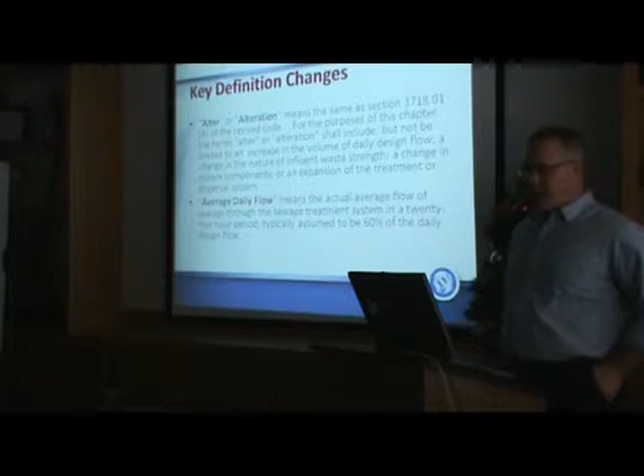A few key definition changes from the first one. Alter and alteration has been spelled out, so it's been expanded. So that would also include any time a person is expanding the size of their house, so that we can look at altering the system to accommodate that additional flow.

Average daily flow was added. All these years we've always looked at peak daily flow, and you all know that is 120 gallons per day per bedroom when we design a system. So 360 gallons per day for a 3-bedroom house. Well, probably just to be more clear about that, that system is really only designed to accommodate an average daily flow, not a peak daily flow every day.

So the average daily flow is now defined as 60% of the design flow. 60% of that 360, which I think is about 210, somewhere in there. The sanitary sewer people use that same figure when they're designing sewers.

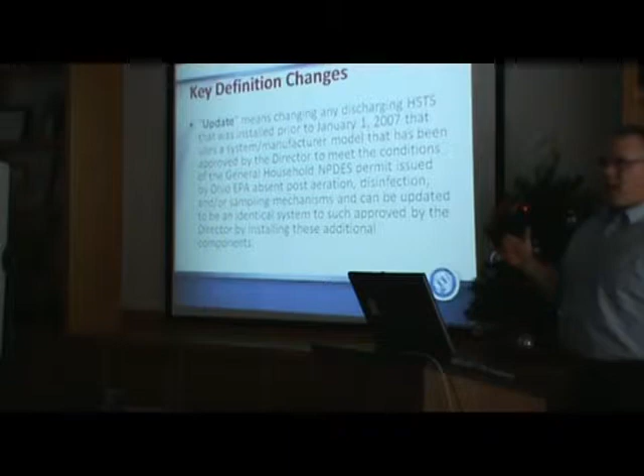Update. Well, they added a definition for update, and what that does is if you have an old aerobic treatment system, not terribly old, not 1977 old, but if we're talking something maybe that was installed in the 90s, early 2000s, it needs to be upgraded for some reason. Let's say something happened to the system and it needs an upgrade.

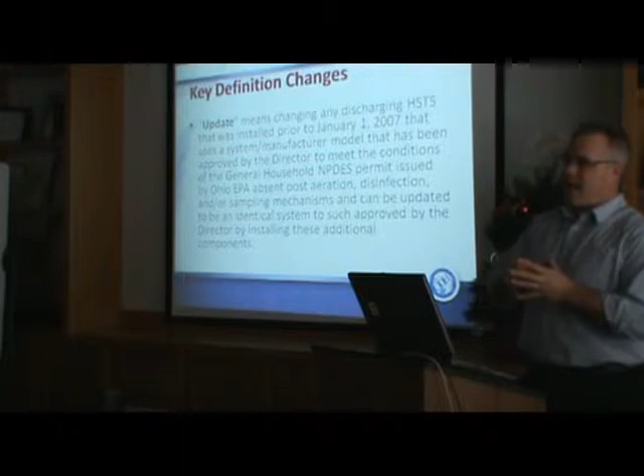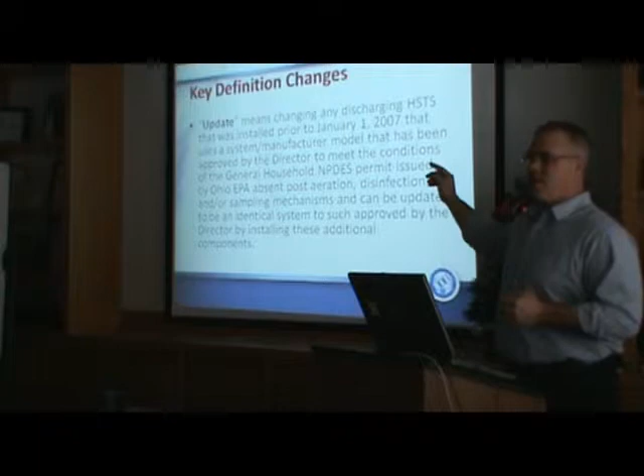It means that if you can add to that system, for example, we'll take a Jet as an example. Let's say you just had a Jet with an upflow filter, and now you can add re-air and UV and make it a compliant NPDES system. You can do it under this definition and under the code.

So in the past there was some kind of uneasiness because people thought you're pretty much going to scrap that system, though it's relatively new, and go brand new. Now it allows you to update if it can be updated. So each system would be a bit different.

Drainage or dry well has been defined, and really the definition isn't as important as a section in the law that says that we should not approve any drainage or dry well. Basically, they're tending toward becoming obsolete.

Now, I personally told the state health department, I said, you don't understand. I've got a large portion of my county developed in the 60s through the 80s that have dry wells, thousands of dry wells. I can't, every time my inspector encounters a dry well, tell a person, you're done. I mean, that's just not practical. That's bad no matter how you look at it.

So she said she understood that, and that as they fail, certainly we're going to replace them, and as they malfunction, we're not going to do things to rejuvenate them. Okay? There are some people who attempt to rejuvenate dry wells, and that's a thing of the past. Because at the state level, they're saying they have to be done away with.

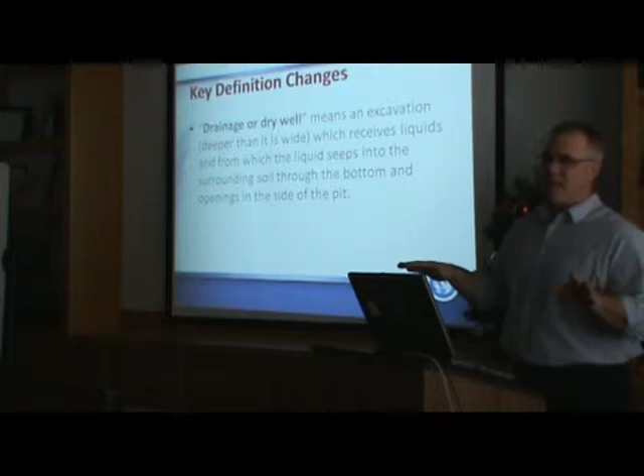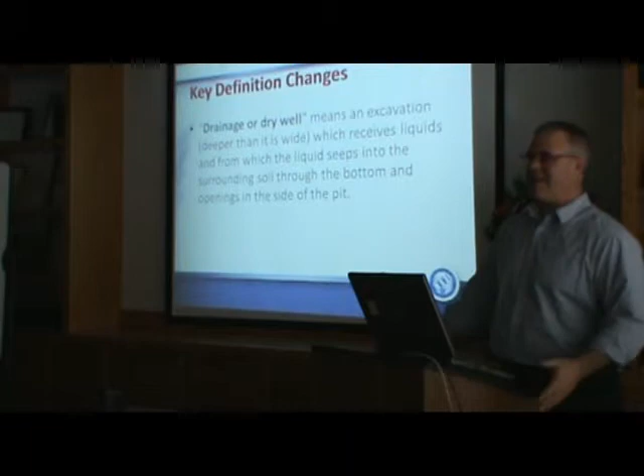The way we're approaching it is they'll be done away with when they fail or they malfunction. Not every time one of you inspecting a property says, oh, it's a dry well. Yeah, we can't go there. That's just too much. So anyway, keep that in mind.

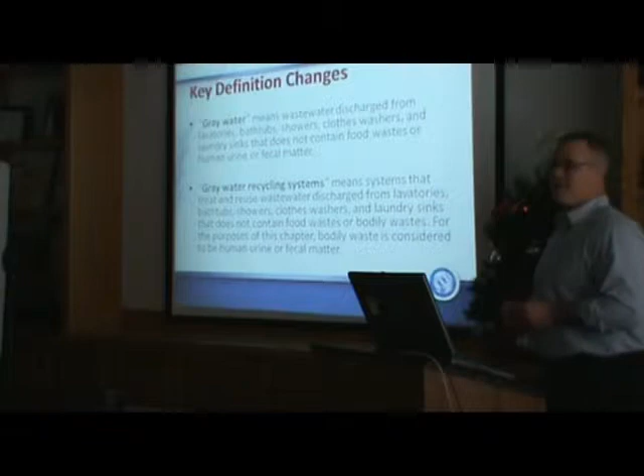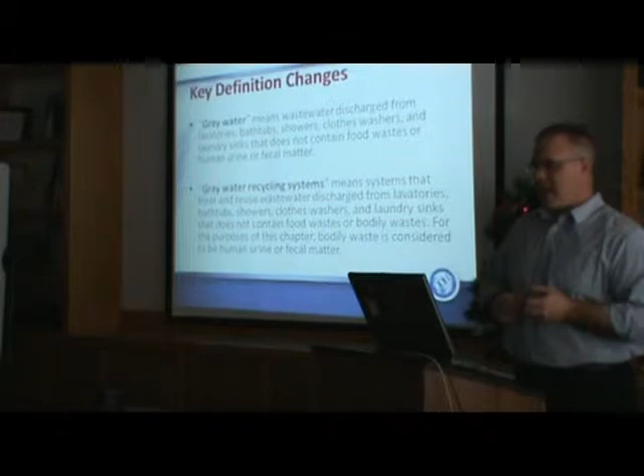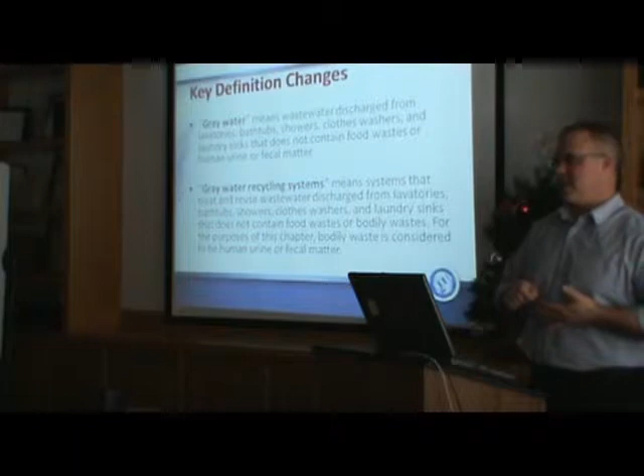Well, since they put gray water systems so extensively into this rule, they had to define what gray water is. And basically what this does is it dictates what fixtures in the house can go into the gray water system and what cannot. So lavatories, bathtubs, showers, clothes washers, and laundry sinks that do not contain food waste, human urine, or fecal matter. So basically, no toilets and no kitchen sinks are allowed to go into the gray water system. And then it further defines what gray water recycling systems are used for.

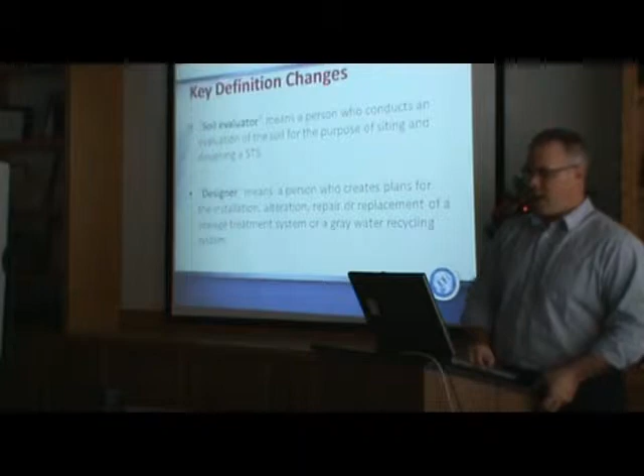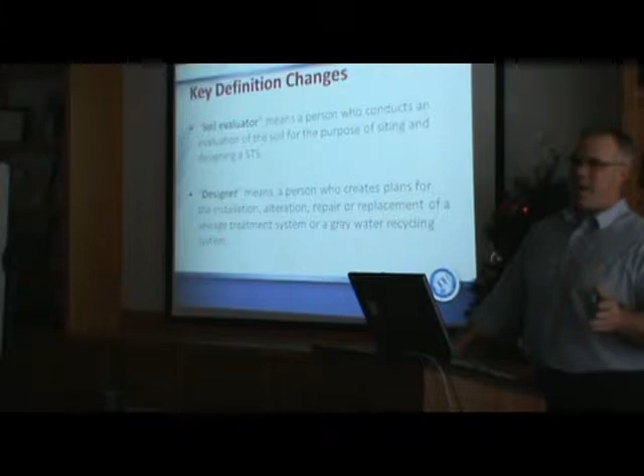They went and also defined better what soil evaluator and designer mean. Now this is a piece, and we'll touch a little bit on this a little later. This is a piece where the legislature did not give authority to the state government to register soil scientists or designers. It just isn't there. Many counties wanted to see these guys get registered. Can't do it. State law doesn't permit it.

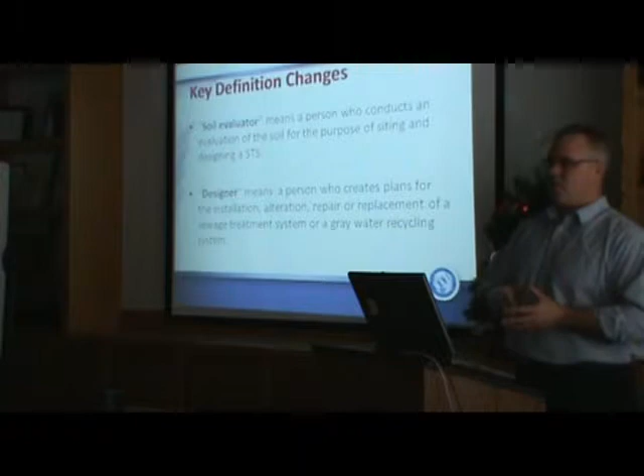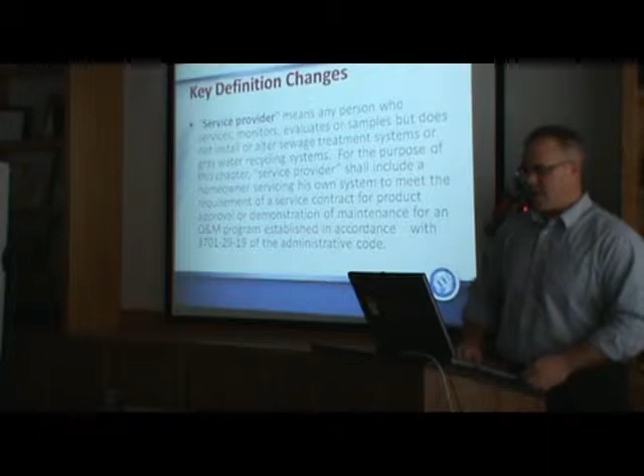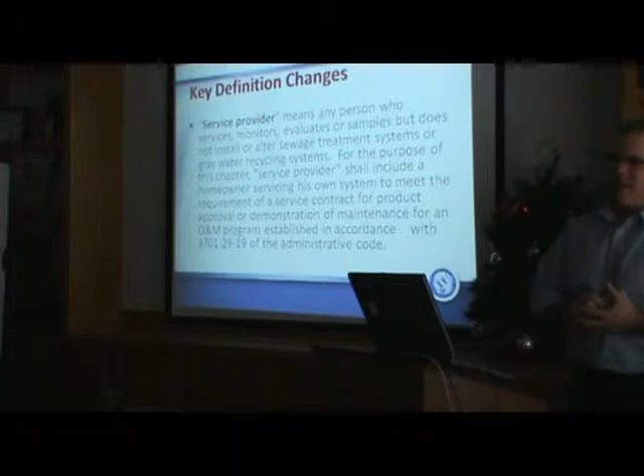So they did try to, though, say, okay, a qualified individual performing the service should have these qualifications. So they did as close as they could to registering them to make sure that they had a competent individual doing the work. Service provider was further defined, and the one probably operative word that we wanted to see added was evaluates. It means any person who services, monitors, or evaluates, because that brings your inspectors into the fold for evaluation of those systems.

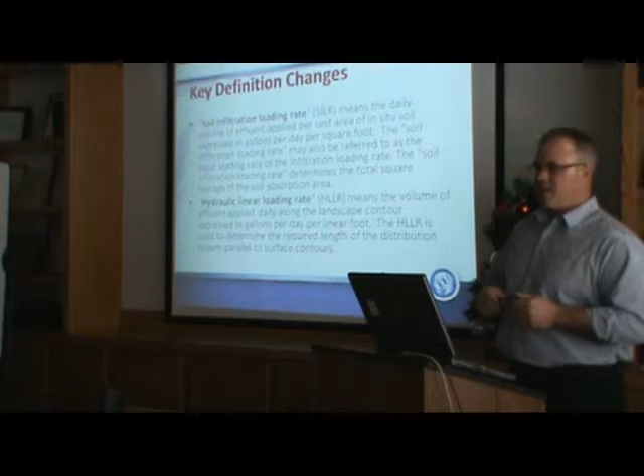Some terms that you're probably familiar with, but just a little bit different than what these are called here. Soil infiltration loading rate is what we call today basal loading rate. If you get a site evaluation form, it says BLR, basal loading rate. This is the same thing, they're just calling it something different. So you'll probably see some changes on the form we use.

Hydraulic linear loading rate is the same as the linear loading rate on the form we use. It's pretty much defined the same. The SILR defines the square footage of the system. So the number we use there defines the square footage, and the HLLR defines the minimum length of that system and how far we need to spread it across the surface contours.

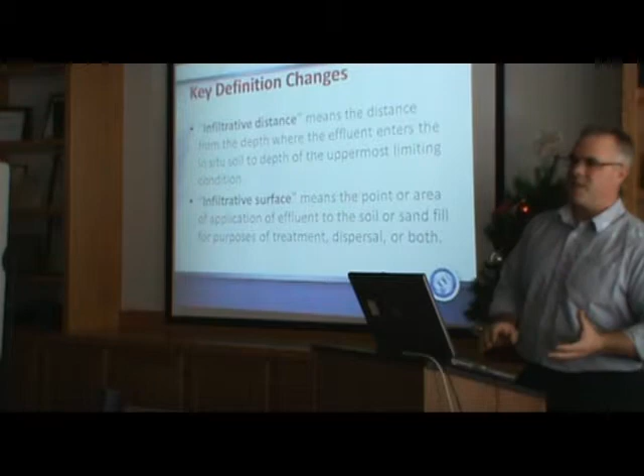Infiltrative distance. Again, if you've done this for any period of time, you probably know what this means already. It's the distance from where the effluent enters the in situ soil to the depth of the uppermost limiting condition. So the distance from the top of the native soil down to the limiting condition is called the infiltrative distance. Why is that important? Because the tables we use to define length and square footage use that term. Infiltrative surface is the point of application of the effluent to the soil or sand for the purpose of treatment.

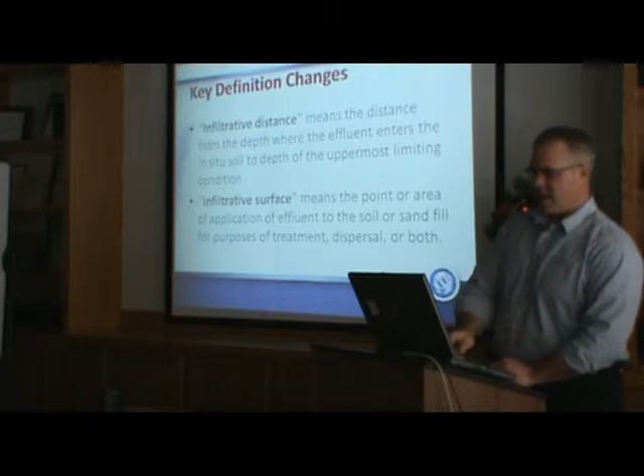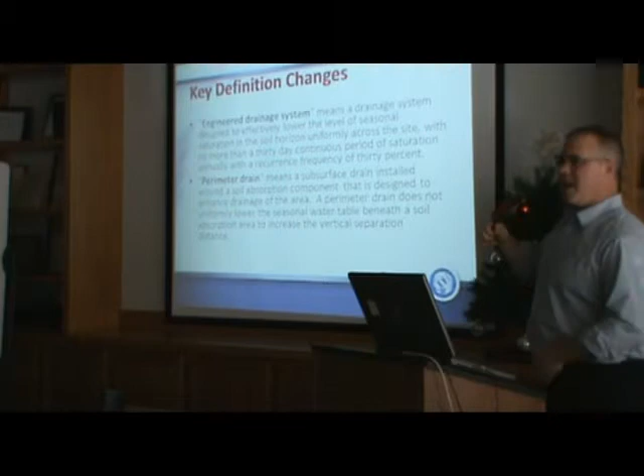Okay, more terms. You might also think to yourself, why are we spending so much time on definitions? Because at the end of the day, when I have to make a decision, guess where I go? Definitions. Definitions make a lot of difference on how we have to interpret something. So, if you recall, the history has been up until 2006, almost every system had a curtain drain, interceptor drain, right? Then in 2007, they took it off the table. Now they put it back in. But there's a difference.

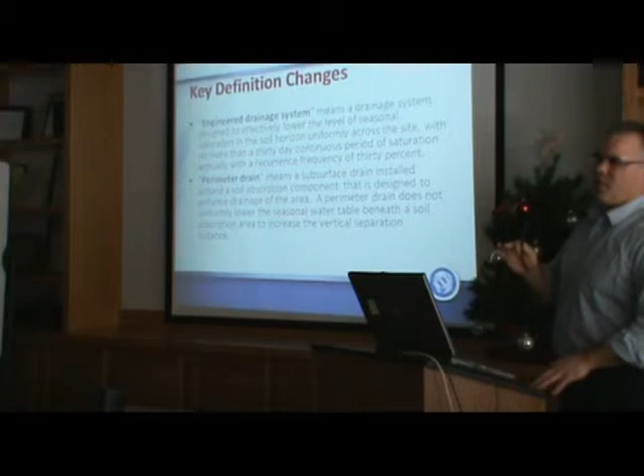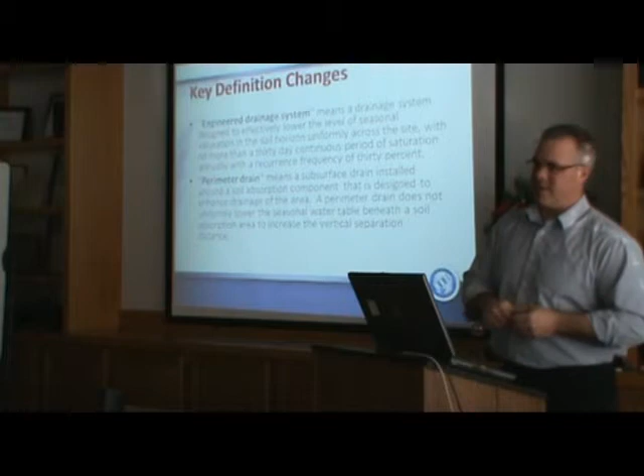What you are familiar with, if you've done this for any period of time, is a perimeter drain. A perimeter drain improves the site drainage, but is not necessarily designed to lower the seasonal perched water table uniformly. You're going to improve your site drainage by putting in the curtain drain that you're all familiar with, that we always use, and that helps. But it is not an engineered drainage system. An engineered drainage system is much more along the lines of what farmers do to their fields. In fact, maybe I'll draw it. They're putting in drainage to more or less permanently decrease the seasonal water table.

So if this is the surface of the ground, and let's say that's the soil restrictive layer. Okay, and here's where the mottling occurs, where the seasonal perched water table hangs out. Let's even put a couple leach trenches in here. When you install agricultural drainage, you define it by the depth that it goes and the distance apart that it's installed. And they're defined by the type of soils that you have. So here's my drain. This is my engineered drainage system.

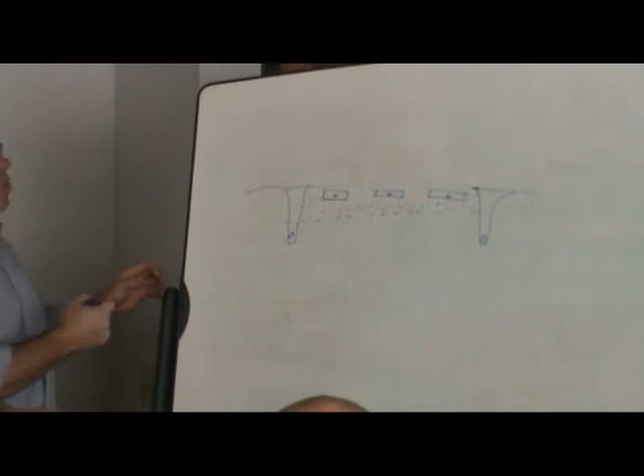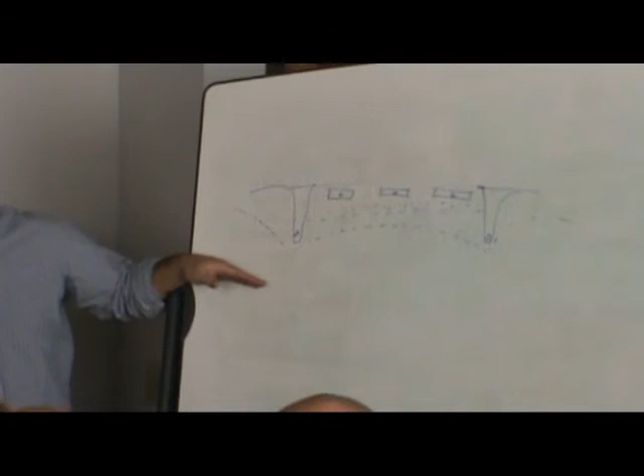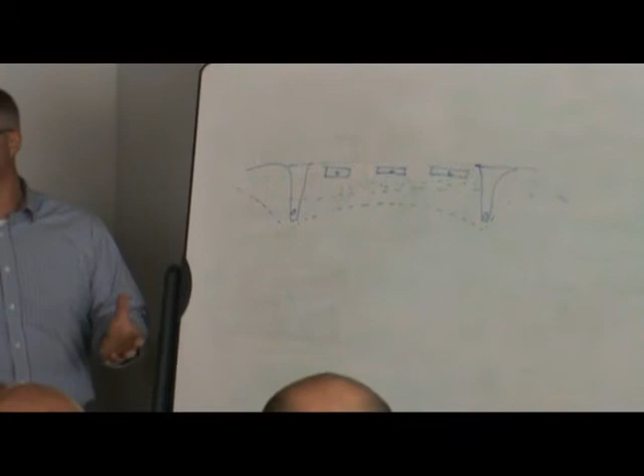So what does this do? It creates a cone of depression. And when you engineer this, you want that cone of depression to uniformly decrease that water table so that you can now get a soil depth credit for doing it. The old perimeter drains didn't necessarily do this. They may have, accidentally. But now the engineered drainage system has to take into consideration more engineering instead of just slapping some pipes around and crossing your fingers. So that's what that's all about. They brought it back so that you can use it, but it has to be done so that it actually does what it says it's supposed to do. Engineered drainage system. Any questions about that?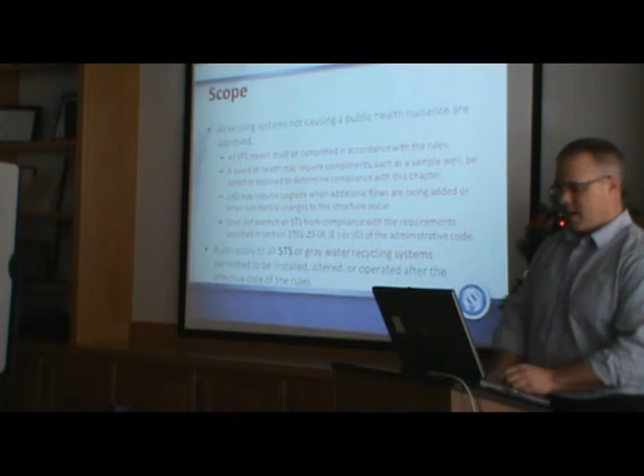And I should mention that top bullet, because one of the most common misconceptions about these rules and the past rules has been that everybody's going to have to upgrade their system because it's not in accordance with the standards that are current now. That is not the case. We are not allowed to have somebody upgrade their system unless it is creating a public health nuisance.